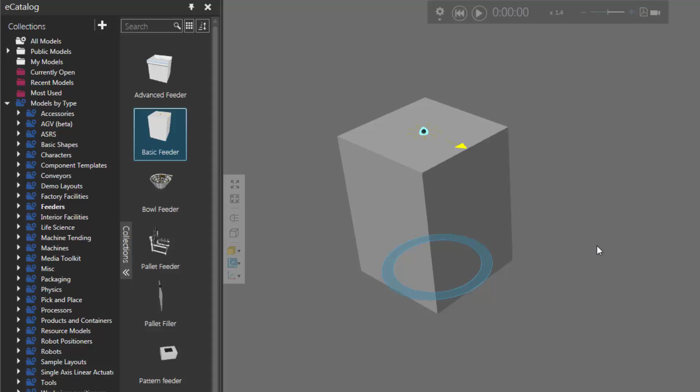Let's go to the Component Properties panel and set the Conveyor Width property to 200, which changes the width of the feeder. Let's now add a conveyor.

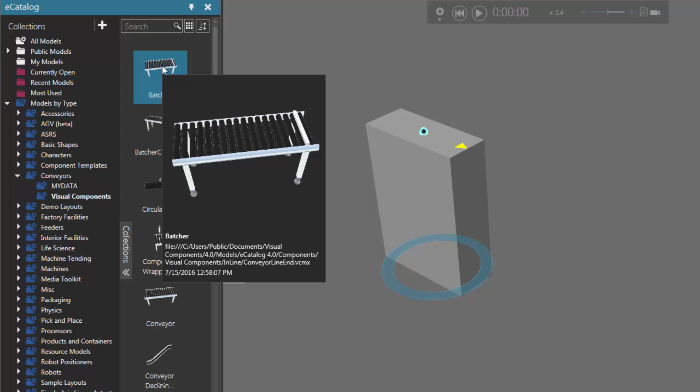Go back to the eCatalog panel, expand Conveyors, click Visual Components, and let's add a type of conveyor that can form a batch or a couple of products that can be picked together. In this case, I'll use the component called Batcher. I'll drag that into the 3D world and plug it into the feeder.

Notice the width of the batcher automatically changed because over here in the Component Properties panel I have the Automatic Parameters Enabled checkbox selected. So any matching properties this conveyor has with the feeder it's plugged into will be changed. Notice here conveyor width is 200.

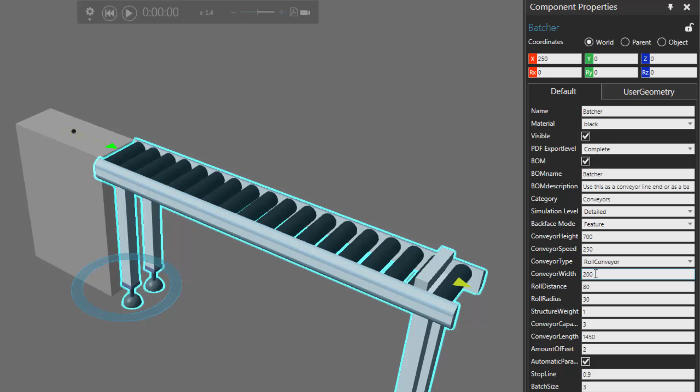Now the batch size of the components is controlled using this property called, yep, you guessed it, batch size. So the batch will consist of 3 components. We have a couple other options. After we get those 3 components and form that batch, we can delete them. We don't want to do that - we want the robot to pick them. So I'm going to clear this checkbox.

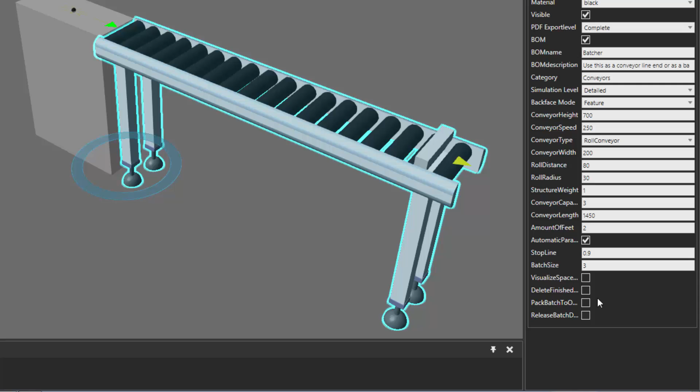And we can pack the batch to one component. What that means is that you're merging all the components in the batch together so they move as one component. This can be very tricky if you're manually teaching a robot and depending on a batch ready signal, so I'm going to clear this checkbox for now. But if you're using a controller component to automatically pick and place components, you may want to turn this on - it depends on your scenario. In this case, we're leaving it unchecked. We're throwing caution to the wind.

Now if I run the simulation and speed it up a bit, notice the feeder creates these cylinders. They have a radius of 50 and a height of 100. And now I have the 3 parts in the batch. If I stop the simulation, there's component 1, component 2, and component 3.

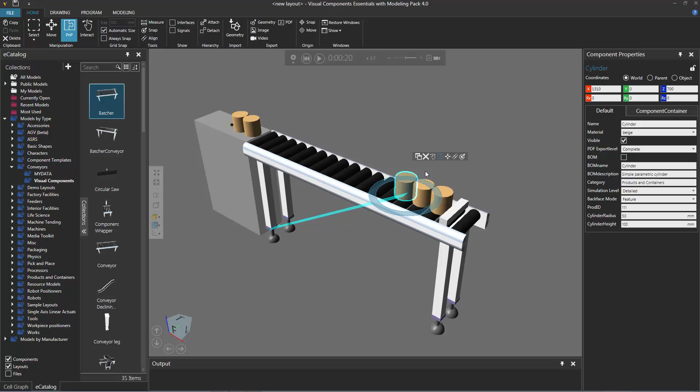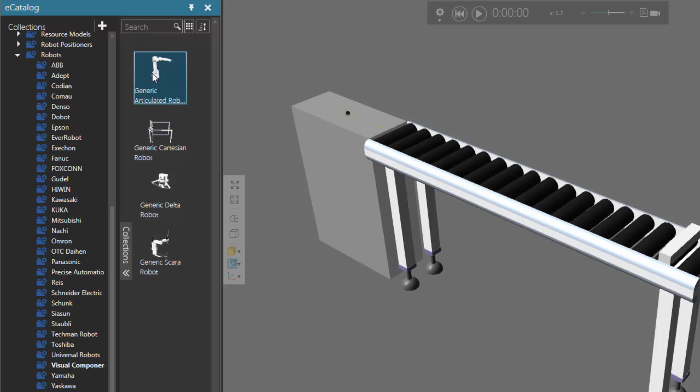Let's now add a robot and a gripper so we can teach the robot to pick these parts. I'll reset the simulation, go back to the eCatalog panel, and go to Robots and expand it. I'm working in the Models by Type collection. Under Robots, I'll click Visual Components, and I'm going to add this robot called Generic Articulated Robot version 3 to the 3D world. Let's drag that in.

Let's make sure the robot can reach the stack, or batch, that we formed on the conveyor. So just move the robot a bit closer.

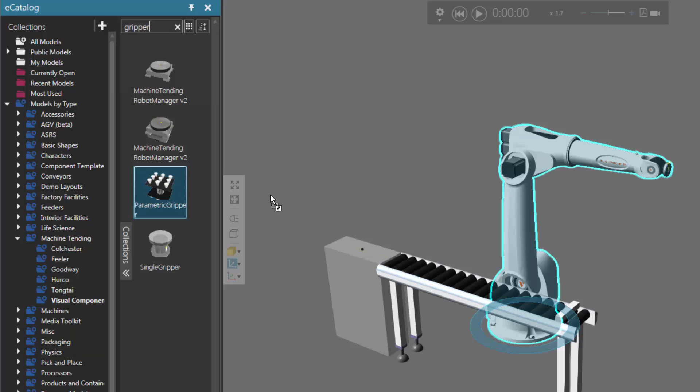Let's now add a tool and mount it to the robot. I'm going to go back to my eCatalog panel and expand the Machine Tending Smart Collection, and click Visual Components. I'll do a search for a tool, and it didn't find anything, so let's search for a gripper instead. It actually found this gripper here - I'm going to use this parametric gripper. I'll drag that into the 3D world and plug it into the robot.

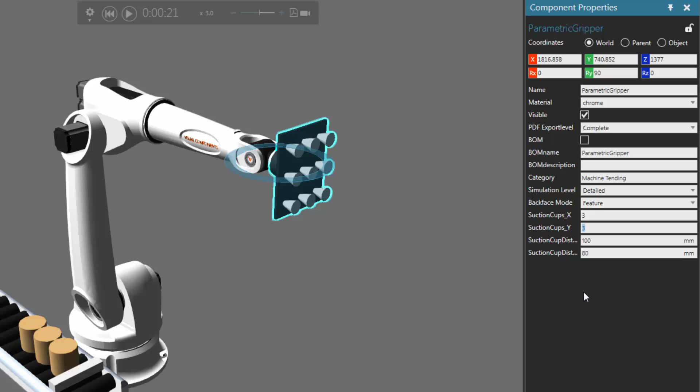Notice that our batch size consisted of 3 parts, so we don't need the suction gripper to be that big - we just need it to be 1 row of suction cups. I'll stop the simulation, select the tool, go to the Component Properties panel, and change the Suction Cups Y property to 1. Now I have 1 row with 3 suction cups. Good, so let's reset the simulation. And now we may want to place those parts somewhere else.

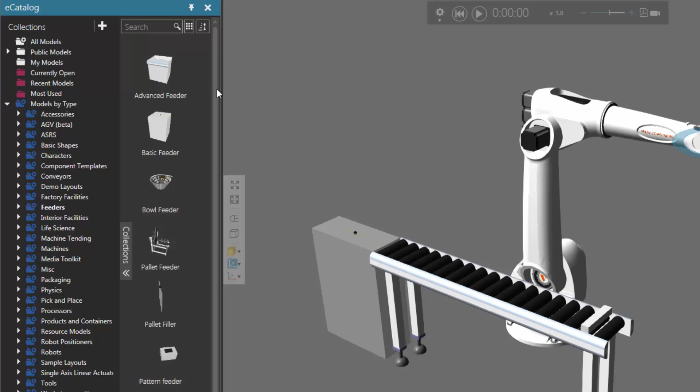So I need to add another feeder and conveyor to the other side of the robot. I'll go back to the eCatalog panel and click Feeders again under Models by Type, and let's now add a shape feeder to the 3D world. I'll just scroll down and use this component here, and drag that into the 3D world.

Let's go and change the view to top, and move the feeder over there. And what type of part do we want to create with this shape feeder? Let's go here to the Component Properties panel, and we'll set the product to be a box. So we want to put those cylinders inside a box, and we want them to stop along a conveyor.

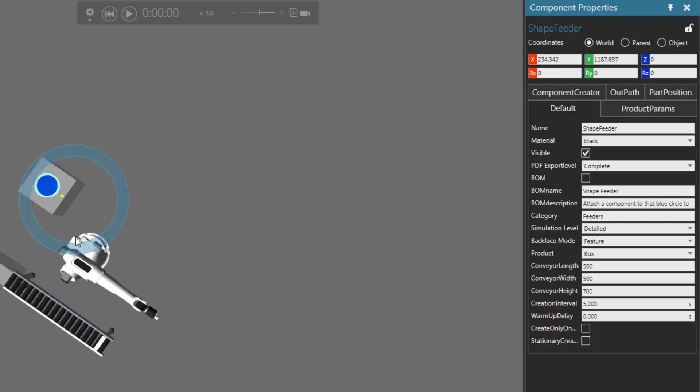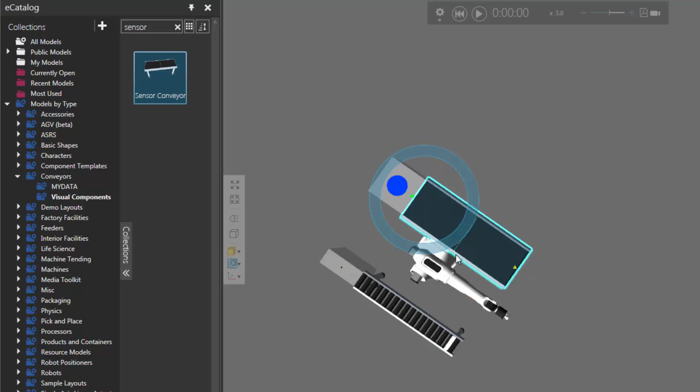In this case, we should use some type of sensor conveyor so it can connect to the robot. I'll go back to the eCatalog panel, and under Models by Type, I'll expand Conveyors, click Visual Components, and do a search for sensor conveyor. I'll type in sensor, and yep, it has this component here, so I'll drag a sensor conveyor into the 3D world and plug it into that feeder. Now it's a bit too close to the robot, so I'll hold down the Control key and add the shape feeder to the selection, and then I'll just move it over here.

Now that we have our layout built, it's time to program the robot. If you know ahead of time that the robot needs to handle multiple components at a time, go ahead and select the robot as a component.

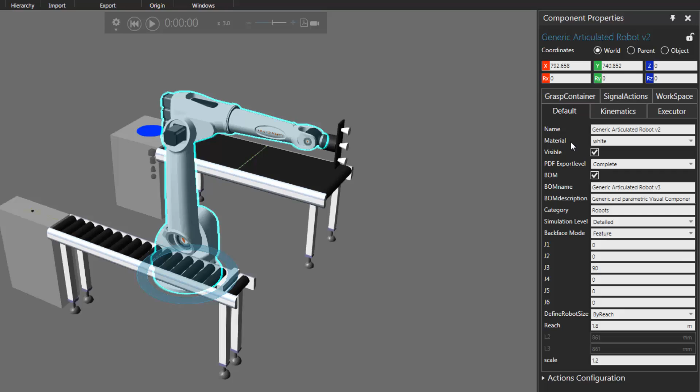Go to the Component Properties panel, click this tab here called Signal Actions, and notice you have a property here called Multi-Grasp. Go ahead and select that, and this indicates that when you're signaling a grasp or release action, the robot knows to detect multiple components, and if you find them, pick them. So make sure you turn this property on if you want to grasp multiple components.

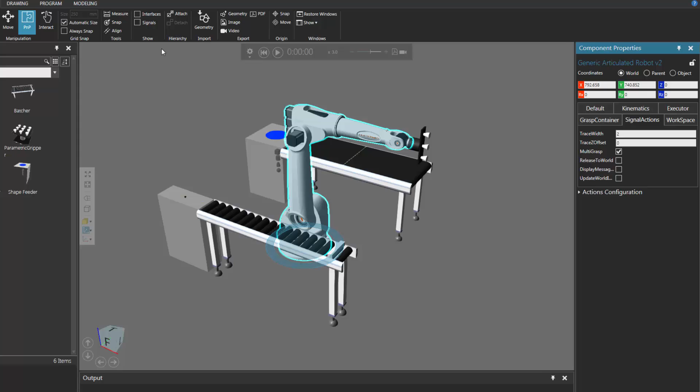Let's now go to the Program tab, and let's go and program our robot. So I use the jog command to select the robot, and we first want to connect the robot to signals in the batcher conveyor and our sensor conveyor so it knows what's going on. Go here to the Show Group and select the Signals checkbox, and here's the inputs and outputs of the robot. I want to connect a signal from the batcher conveyor as an input to the robot.

So I'll expand the signal editor of this conveyor. I'll drag this red circle away from the editor to display a wire, and I'll wire that connection to this in section in the robot. Let's change that in signal from 0 to be 50. I'll type in 50 here, and yep, there it is, and change it. So now the batch ready signal, when the batch in the conveyor is ready, it's going to signal the robot, and the robot will know that the batch is ready to be picked up.

Likewise, we need to know when the box arrives at this sensor in the conveyor over here. I'll expand the editor of the sensor conveyor, and we want to know that sensor signal, so that'll be an input to the robot. I'll drag the red circle to display a wire, connect it to the in of the robot, and let's change that in signal from 0 to be 51, like so.

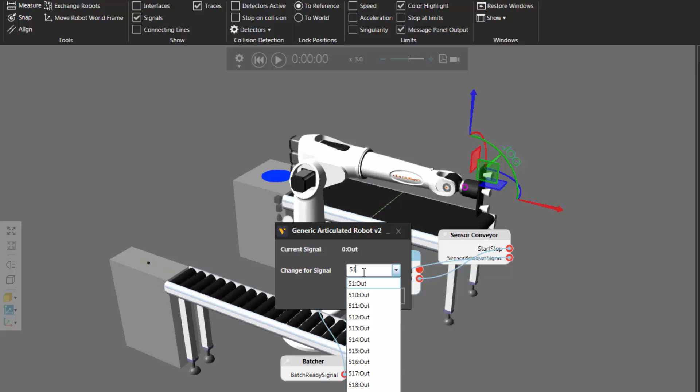Now when the box reaches this sensor, we want to stop the conveyor. So I'm going to change this start stop red circle, drag it away to display a wire. I want the robot to send out a signal to set that value, so it's going to set the start stop value. I'll change that from 0 signal to be 51, so we remember which component we're working with. So 50 will be reserved for the batcher conveyor, and 51 will be for the sensor conveyor.

So now we have the robot wired up, so we don't need to see these anymore. I'll go back to the Show Group and clear the Signals checkbox. Let's now see how these signals work out. Go here to the Program Editor panel, and what we first want to do is wait for our box.

So in the main routine, I'll add a wait for binary input statement. And in the Statement Properties panel, we're waiting for that input signal from port 51, and we want to wait till the value is true. And then what we want to do is send out a signal.

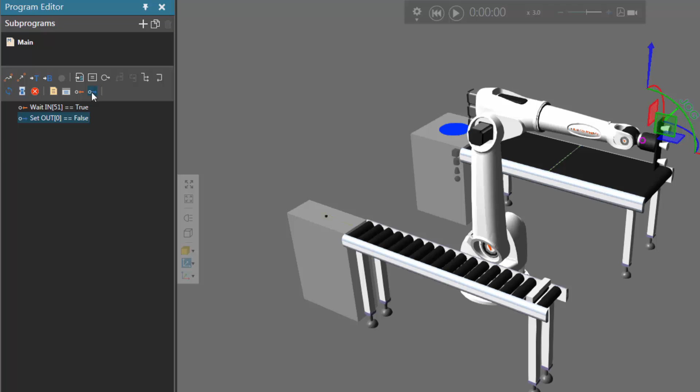I'll add a Set Binary Output statement to the program, setting signal 51, connected to that port, to false. I won't check the output value checkbox here. Let's run the simulation and see how this works. Notice the robot stopped the box at that sensor.

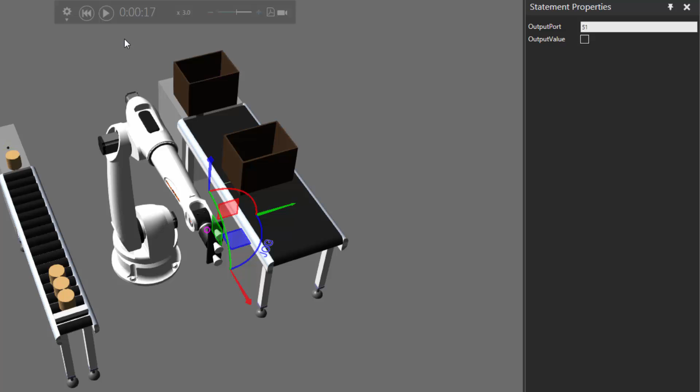You may be wondering why I'm not just jumping into teaching you how to grasp multiple components. It's always good practice to go step by step and test along the way. Now that we know the robot will stop the box, let's check the signal received from the batcher conveyor that tells the robot the batch is ready to be picked up.

I'll reset the simulation and go back to the Program Editor panel. I'm going to add another Wait For Binary Input statement, waiting for a signal from the batcher conveyor on port 50. We want the input value to be true, meaning the batch is ready. I'll use the wait trigger checkbox, so this waits for a signal event. The robot will evaluate the value of the signal connected to port 50, and if it's true and it gets an event or update that the signal has changed, the robot will know the batch is ready.

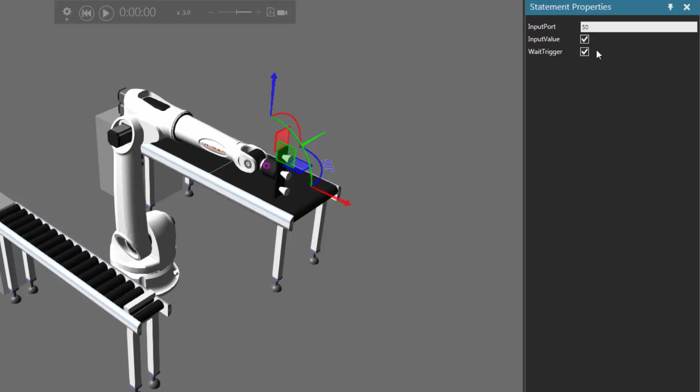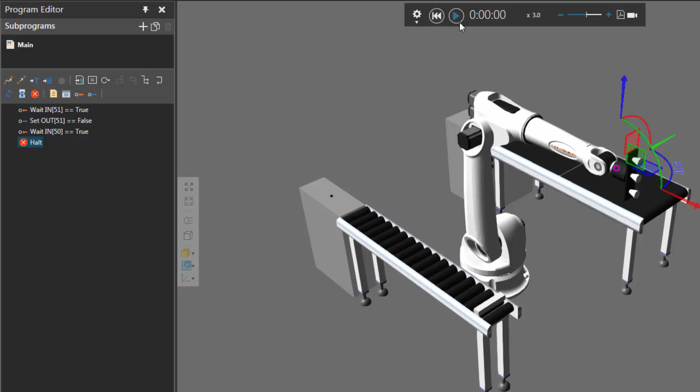Let's see how this works. I'll go back to the Program Editor panel and do something after we get that signal, so let's stop the simulation by adding a Halt statement. What do we expect to happen? The box should stop at the sensor conveyor, and after we get 3 cylinders, the robot will get the signal and the simulation will stop. I'll run the simulation — the box stops, we get part 1, part 2, and at 3 parts, notice the simulation stopped.

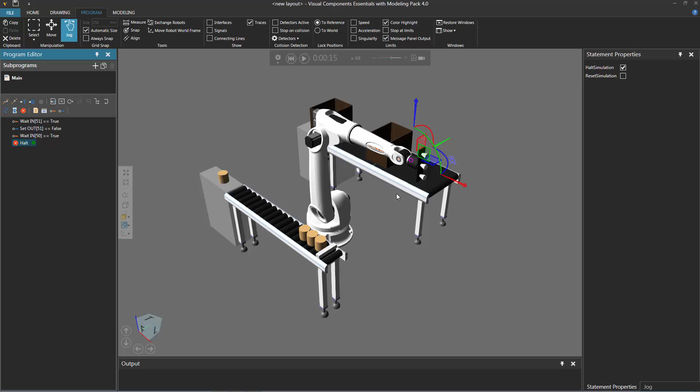Now that we know the signals are working, we need to decide what tool frame on the robot we'll use to pick and place these parts from this conveyor into this box. With the robot selected, I'll go to the jog panel and use Base 1. Notice we have an imported tool frame from the gripper called Double Tool 1. We could use that, but to signal a grasping action without configuring any actions on the robot, I'll just use Tool 1, which is automatically set to perform a grasp and release action. So I'll set Tool 1.

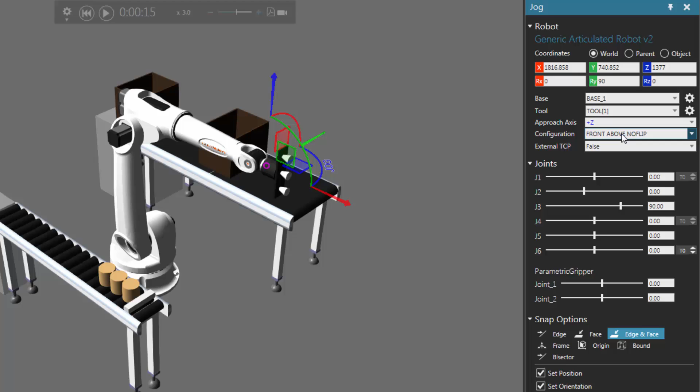I'll click the gear icon to select it in the 3D world, and now move Tool 1 to where the imported tool frame is on the gripper. To do that, I'll go to the 3D world toolbar, click Frame Types, and turn on Robot Tools to show tool frames. Notice there's Double Tool 1. I'm going to move Tool 1 to that same location, so when I signal a grasp and release action, the robot knows to do that.

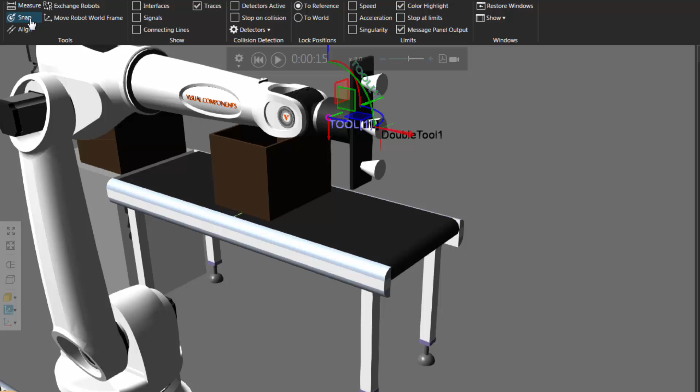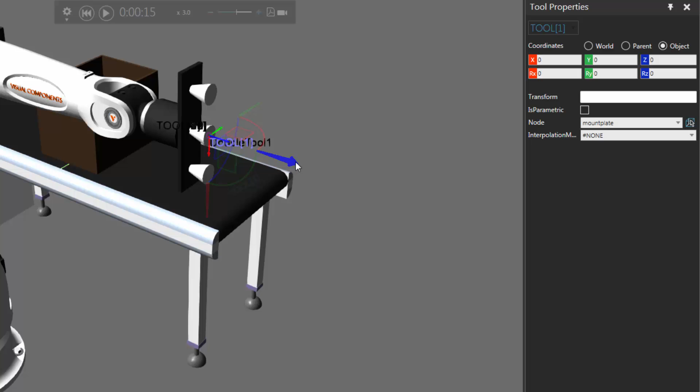Let's use the Snap command in the Tools group, and change the snap type to Frame or Coordinate System, so I can snap to a frame in the 3D world. I'll click that Double Tool 1 frame, and that's where Tool 1 is. I'll check the tool orientation by changing the coordinate system to Object — now I see the tool's coordinate system, and notice the z-axis is pointing in the positive direction. We're now ready to teach the robot to pick and place multiple components.

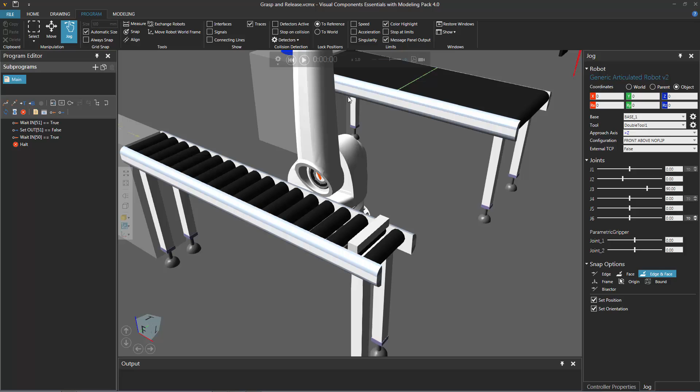I recommend saving the layout, or you can just load the reference layout as needed. I'll use the imported tool frame mounted to the robot, so in the jog panel I'll set Tool to DoubleTool1, and I'll go ahead and start the simulation, speeding it up just a bit.

So when the robot knows that the batch is ready, we'll teach the position to pick this batch of parts. Alright, it's time for some action. So let's now snap the robot to this center point here.

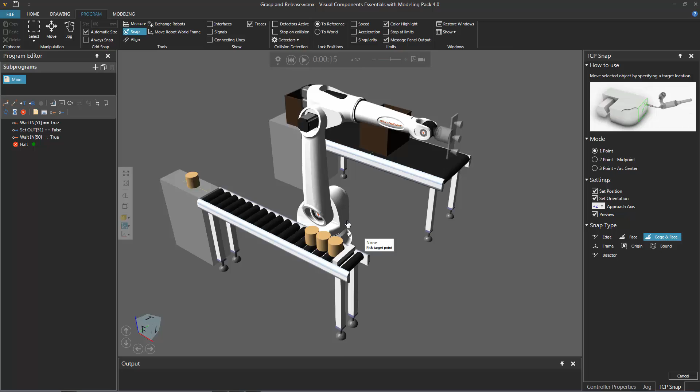So we'll go to the tools group and click snap, and let's actually snap to the face center there. The preview of the tool looks good, so I'll just click that point. Now the robot's at that location.

I'm going to teach this in a different subroutine in the program. So I'll go back to the program editor panel, click the plus sign to add our new sequence, and let's just rename this to be pick batch.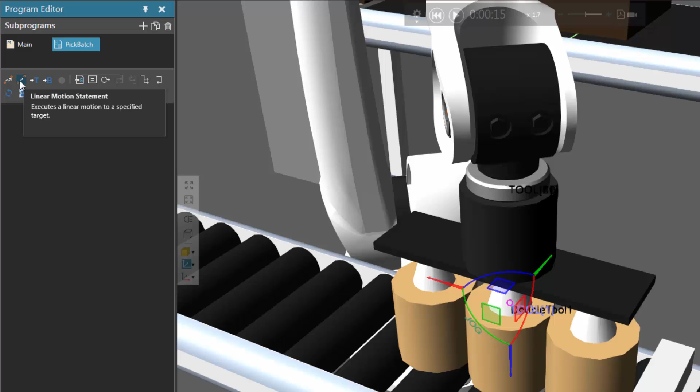I'll teach this first position as a linear motion. I'll then use a set binary output statement, and let's go to the statement properties panel, and we're going to use signal action signal of 1, which is mapped to tool frame 1, and we're going to turn the output value on, so we'll select this checkbox so the robot knows to grasp something. And now let's go ahead and lift up.

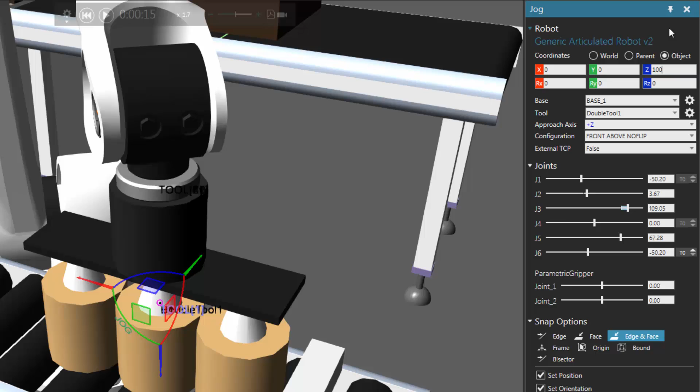So let's teach an approach point and a retract point. I'm using the tool's coordinate system right now, so in the z-axis I'll add 100, and we're actually moving in the positive direction of the tool's coordinate system, so we'll take away 100 to move the robot back up, and let's take away another 100, and the robot moves up.

So let's teach that as a linear motion and a point-to-point motion, and let's do the point-to-point motion as the first statement in that routine. So the robot will go to the approach position, go down to pick up the parts, signal the grasp action, and then retract up. So let's call this routine now in our main routine.

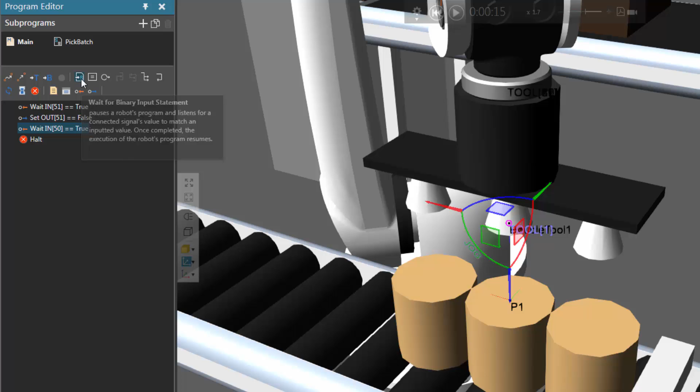I'm going to call it before the halt statement, so I'll insert it after the wait input here. Add a call sequence statement, go to the statement properties panel, and set that to equal pick batch. So if I reset the simulation and run again, let's see how this works out.

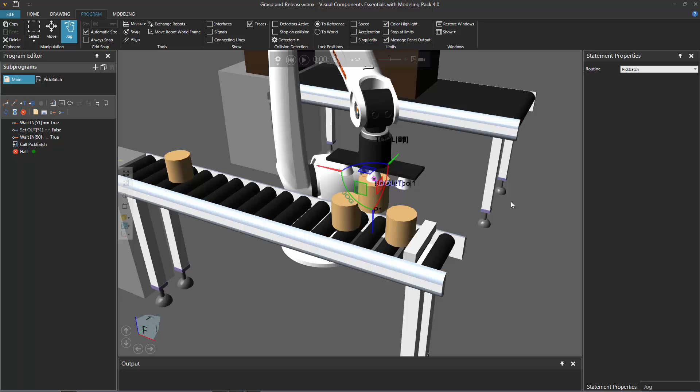So there's the third component. Robot goes in, and notice what happened: it picked up one component. Now you'll sometimes come across this situation, and what you need to do is change the detection area of that signal action for grasping something, and I'll show you how to do that now.

So what I'll do is reset the simulation, and now click the robot with the jog command to select the controller. Notice here in the controller properties panel you have this actions configuration section. Now you can select the robot as a component and still see this section—this is just another way of doing it.

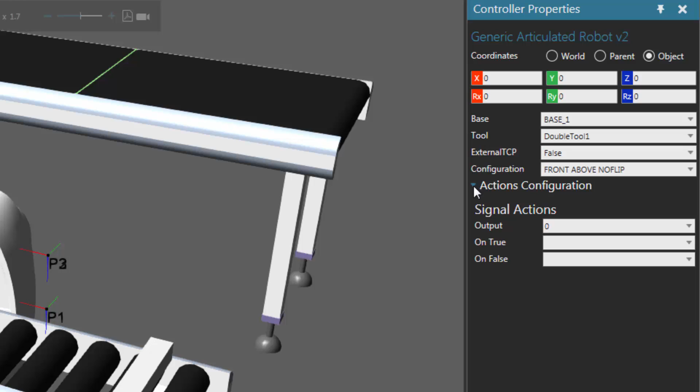So I'll expand action configuration, and we're working with the output value of 1 with tool frame 1. Notice when signal value of 1 is true, it's going to grasp something, and when it's false, it will release something. Now when it's grasping something, it has this detection volume size, so it's going to detect a component and grasp a component that's within that volume space.

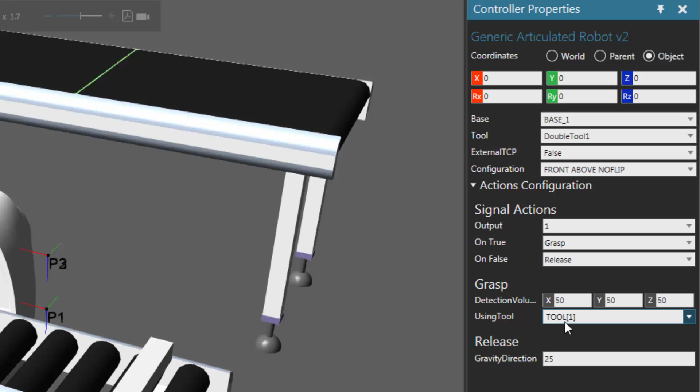Now we already set the robot to grasp multiple components, we just have to change the detection volume area, because you can see right here it's quite small, and we're using tool 1 to be the origin of where that volume space is being generated from.

So what I'll do is go to the program editor panel, and I'm going to put the halt statement before I call that pick batch routine, and just run the simulation really quick to get the batch. So we have 2 components, 3 components, great.

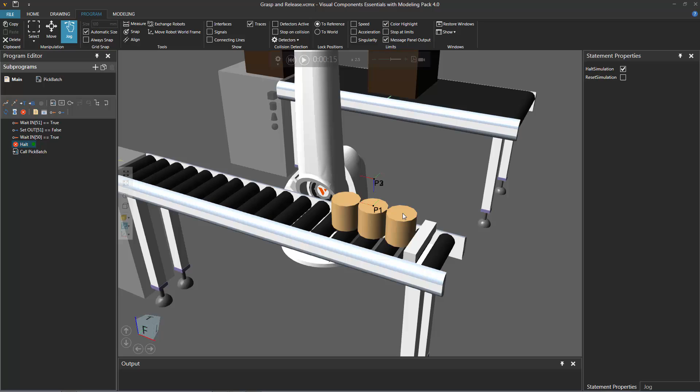Let's now take a measurement to see how big we have to make the detection volume area to pick these 3 components. So I'll do a measurement. I'll go to the tools group, click measure, and let's measure from this edge point here to this edge point here—we'll click free point here and just click that point there. It's about 300 millimeters.

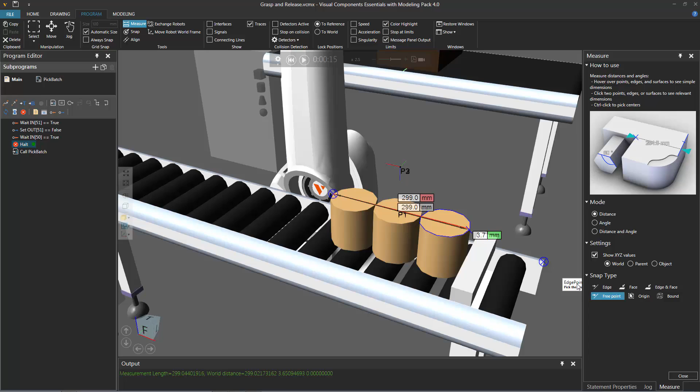So going from point 1, I can have a cube or rectangle that goes 150 millimeters that way and 150 millimeters that way, and it will detect all three of these parts. So to see how that works out, I'll close the measure tool.

I'll go back to the controller properties by selecting the robot, like so. And for signal action, let's go back to the output of 1. For the detection volume size, I'm going to change the x-axis because the tool position of the robot will be pointing downwards, and from the robot position you get an indication that the x-axis, its positive direction, is going in that way.

So I'll change this to be 150. And if you want to be on the safe side, you could make this larger by typing in 300, but you might pick more than one component than you intend to.

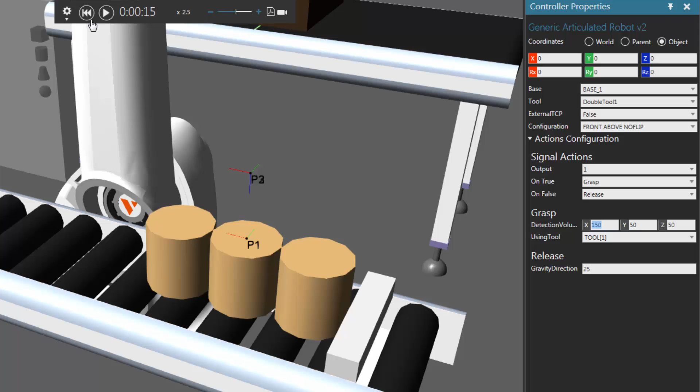It's always good practice to have your volume size just be as small as it needs to be. If I set it to 150 along the x-axis, we should expect a length of 150 going that way, a length of 50 going that way and this way, and down to 50 along the z-axis. So let's reset the simulation, and change where the halt statement is located in the routine. I'll drag that underneath the pick batch, and run the simulation to see how this works out.

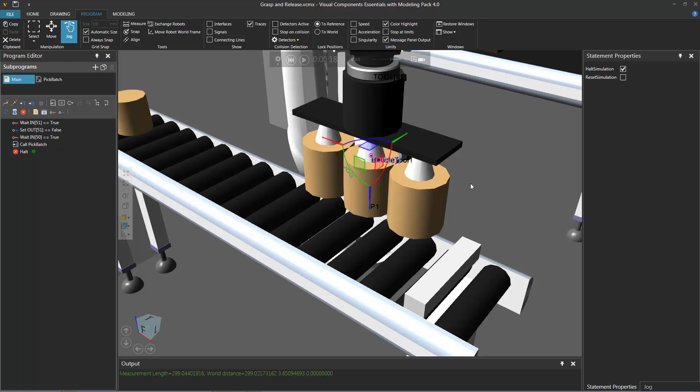Here comes the third part. Come on, robot. Yeah! Notice the robot detected all three parts and grabbed them. And once again about the detection volume space, notice it's referencing the tool's coordinate system, so it goes down and creates this volume space to detect these three parts.

What we want to do now is place these components in this box. To do that, I'll go to the Program Editor panel, add a new sequence, and rename this to be Place Batch. Now I want to move these components inside this box.

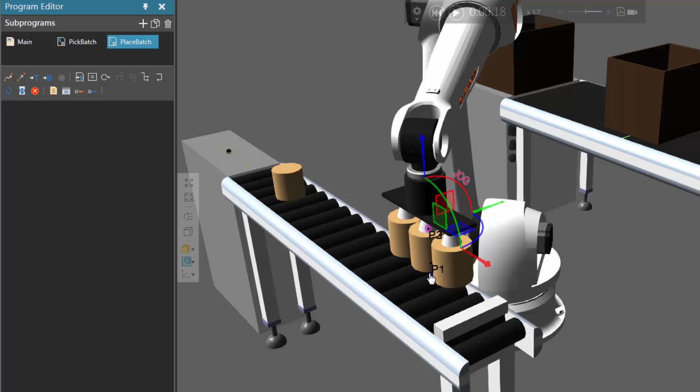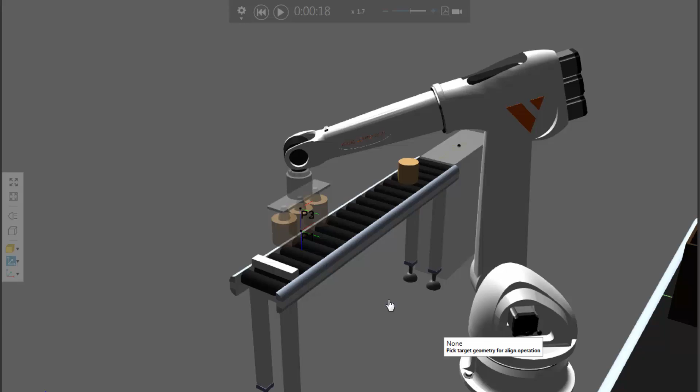To do that quickly, I'll use the Align tool. In the Tools group, I'll click Align, and let's snap the origin of one of these cylinders to the origin of the box. Under the Align task pane, Snap Type, I'll click Origin, and let's use the origin of the middle cylinder here. I'll click there, and now let's select the origin of the box so we can see the preview. So far it looks good, and the robot snaps there.

But I do think that there's a distance from the origin of the box to this face here, so I'll do a quick measurement. I'll go to the Tools group, click Measure, and measure from the origin of the box to this face here. It's a difference of about 10 millimeters.

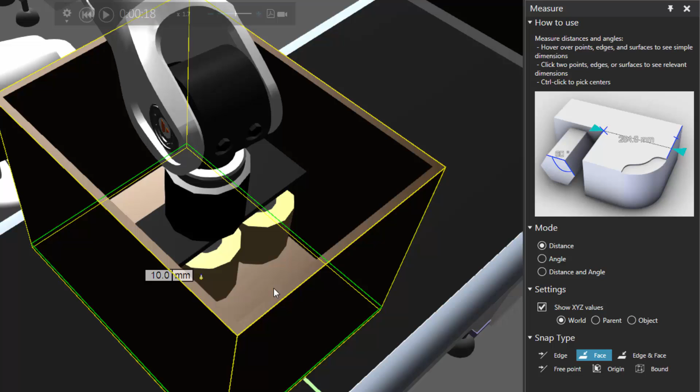So I'll close out of the Measure tool, go to the Jog command, and work in the Tools coordinate system. I'll set the coordinate system to the object here, and we're going to move back 10 millimeters, so minus 10. Notice the robot moves up, and that looks good.

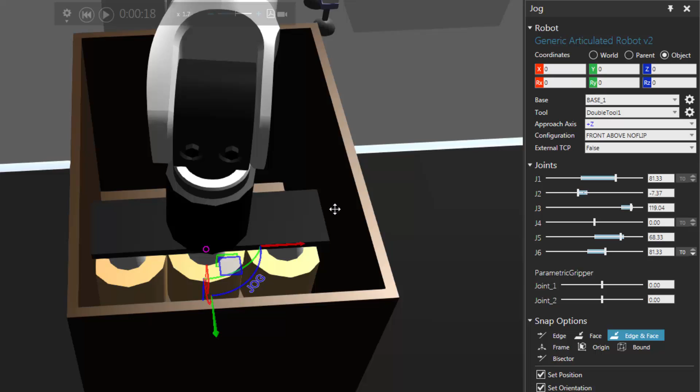But it seems that the mounted tool of the robot is colliding with the inside of the box, so let's rotate the tool a bit. Here in the Jog panel, I'll set RZ to be 90. That looks good, yep, we have enough space.

Let's now teach this as a linear motion. In the Place Batch routine, I'll add a linear motion statement, then add a set binary output statement. In the Statement Properties panel, we're using Signal 1 and Toolframe 1 to signal the release action, so output value in this case is going to be false.

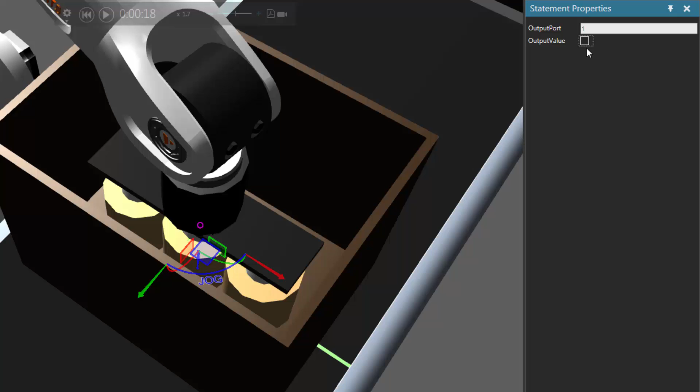Let's now teach a retract and approach position, so I'll just move the robot up. That looks good, so let's teach that as a linear motion and a point-to-point motion. We want our point-to-point motion to be first, so the robot will just move to that approach position, go down, release the components, and move back up.

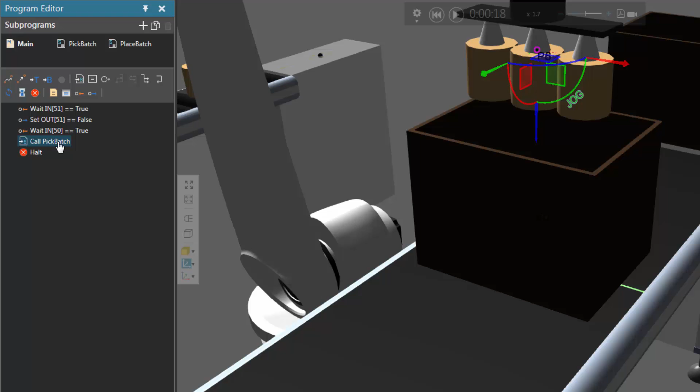Let's now call the Place Batch routine in our main routine. I'll click the main routine here, and after we do the call to the Pick Batch routine, let's call the Place Batch routine.

And we want to turn the sensor conveyor back on, so I'll add a set binary output statement. Remember, sensor conveyor was using port 51, so we're going to set the output value, the signal connected to port 51, to be true. So the start-stop signal in the sensor conveyor will turn the path back on.

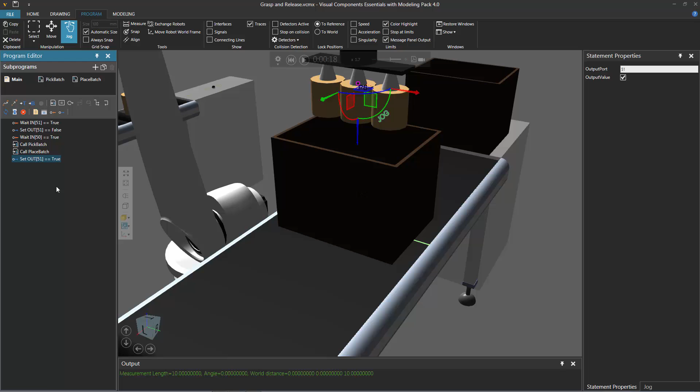And let's actually get rid of the halt statement. I'll select it here in the statements list and press the delete key, then reset the simulation and see how this works out.

Now there is one thing I want to show you, so I know an error will happen. I just want to let it work its way through. So we're waiting for the batch, the robot picks up the parts, he places them in the box. So far so good. And whoa, wow, whoa, wee, whoa.

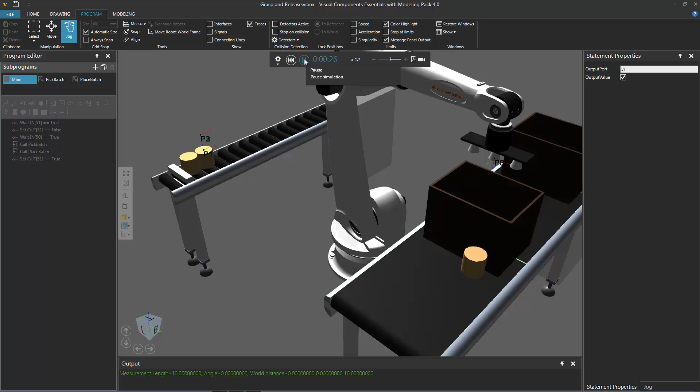Look what happened: the robot released the components, but they weren't actually released to the box, they're not contained in it. So now the cylinders and the box are moving separately. And why did that happen?

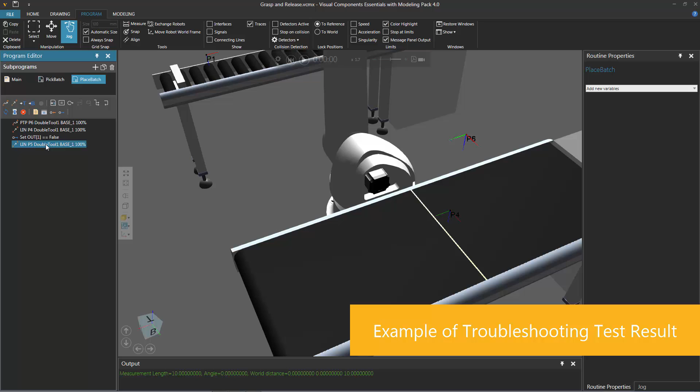Well, I'll show you. So I'll reset the simulation, and in the program editor panel, I'm going to go back to the Place Batch routine. After the robot goes down to place the part, let's actually add a halt statement. I'll run the simulation and just speed it up real quick.

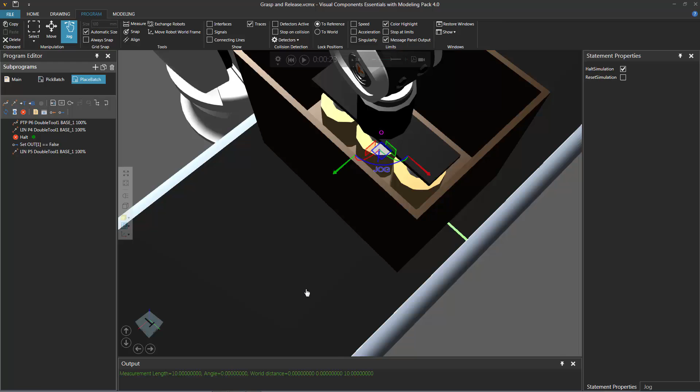So the robot goes there. Now, what happens here is that when you're releasing a component, the robot is using what's called a gravity direction. I'll select the box here and hide it for now. So when you're using a gravity direction, the components attached to the robot at this tool frame are moved down a certain distance, and that position is used for a collision detection test. Whatever those components collide with, that's what they're attached to.

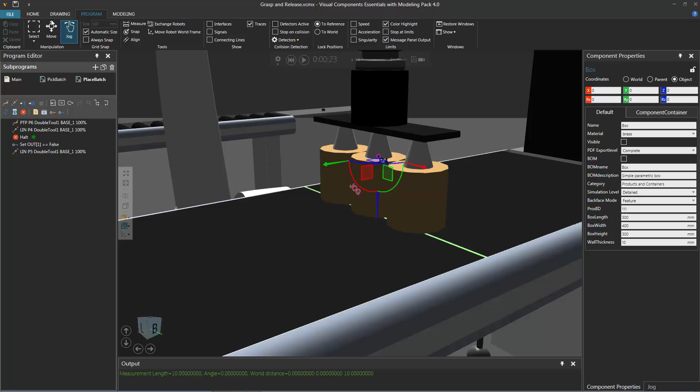Otherwise, there's another setting in the robot I can talk about briefly. I'll go back to the Home tab and select the robot now. I'll go to the Component Properties panel and click Signal Actions. When you want to release a component directly to the world, you can just turn on this checkbox here, and it will be released to the world.

But when you're using signal actions, you have to be careful with your gravity direction. I'll set output to be 1. Notice here that when you're releasing, you have this property called gravity direction. That means the components will be moved down in the positive direction of the tool's coordinate system by this distance, and whatever those components collide with, that will be what they're attached to.

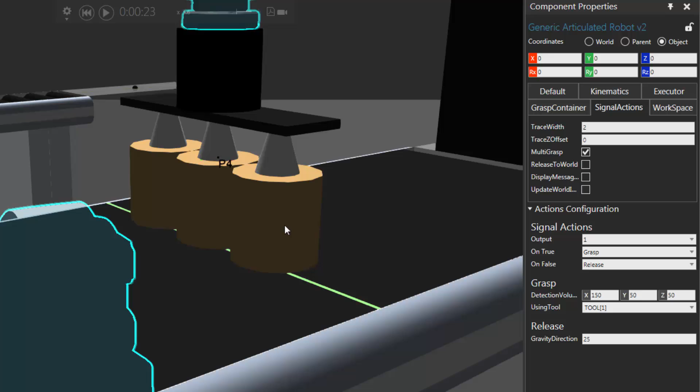To demonstrate, I'll select one of these cylinders, and in its coordinate system, I'm going to move it down. Assuming it's the tool's coordinate system, I'll move it down 25 millimeters, so minus 25. That's where the component will move to during the test — it's not actually going to move 25 permanently. Whatever this component collides with is what it's going to be attached to.

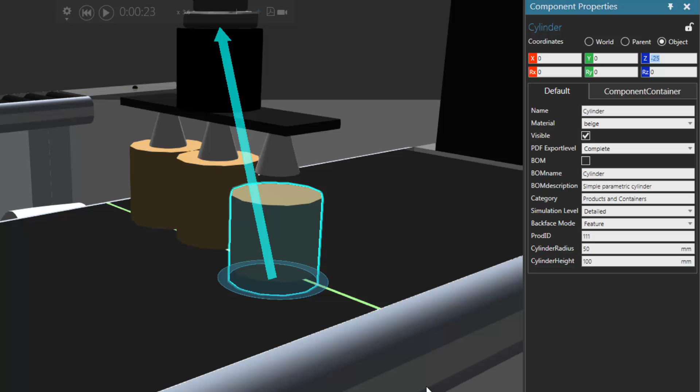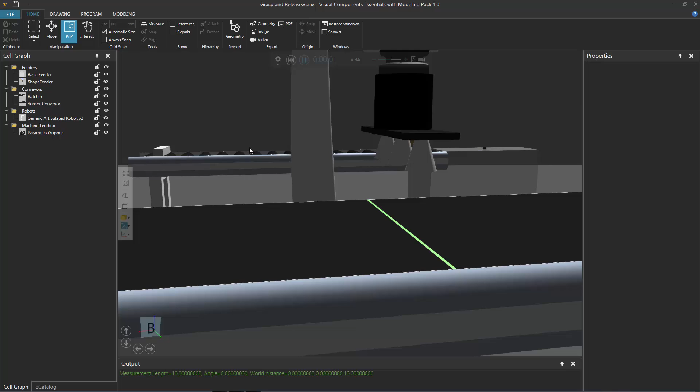Notice here that the cylinder is colliding with the conveyor, so that's why this cylinder was attached to the conveyor, not the box. If I make the box visible again, I'll go to the cell graph panel, and under products, it actually was a dynamic component, so I'll have to reset the simulation. Select the box, and let's stop the simulation.

Let's actually take a measurement. Well, we really don't need to, because we know that we're placing the cylinders right on this face of the box. So our gravity direction doesn't need to be 25, it could just be 1 millimeter.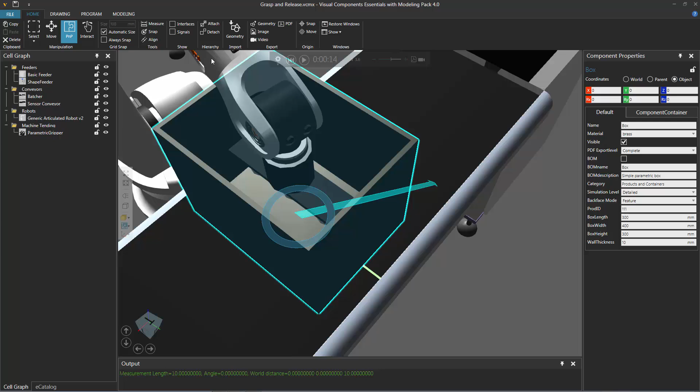So I'll select the robot again as a component, and let's reset the simulation afterwards. For the signal actions here in the Component Properties panel, I'll go back to my signal action of 1, and let's now set gravity direction to be just 1, because the cylinders are touching the top face of the box that's inside it.

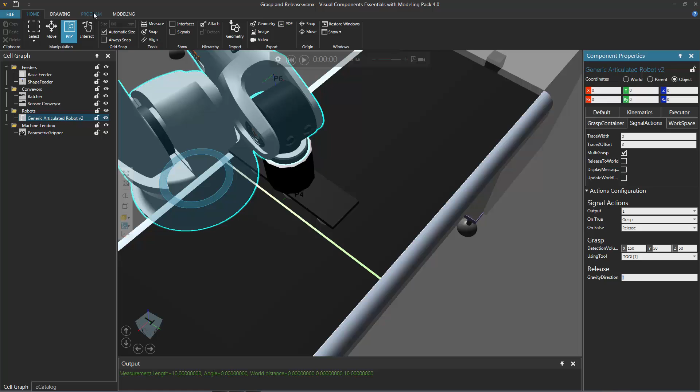So now if I go back to the Program tab, let's actually change the state of the robot, because I started this simulation when the robot was here, so it saved this joint configuration. I'll go to the jog panel and just set it back to normal. Oof, that's not normal, sorry. So J2 should be 0, J3 should be 90, and all the other ones can be 0, like so.